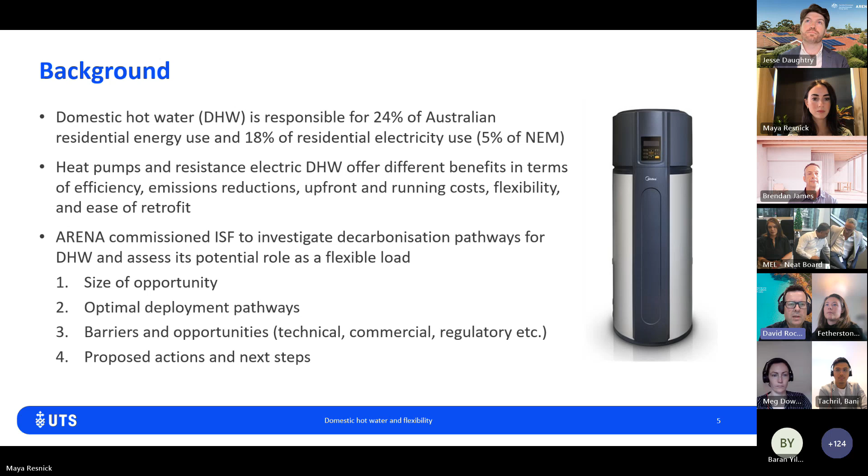Next slide, please. So what did we do? We did a literature review and a number of interviews with stakeholders to identify and inform some of these development pathways and some of the barriers and opportunities. At the core of the study, we had a stock modelling exercise. So we have an existing stock model that we use at ISF that was originally built by our water team and then has been adapted to include hot water. So there's an energy component to that.

And so using that model, we're able to model the number of currently installed different technologies, the mix of technologies, and do some different scenarios about what that stock might do into the future, and then from that assess both the efficiency and the capability in terms of flex demand of that technology. And then at the end of the project, we had a sense-making workshop with ARENA to clarify some of these deployment pathways, the barriers and opportunities, and map some proposed actions and next steps.

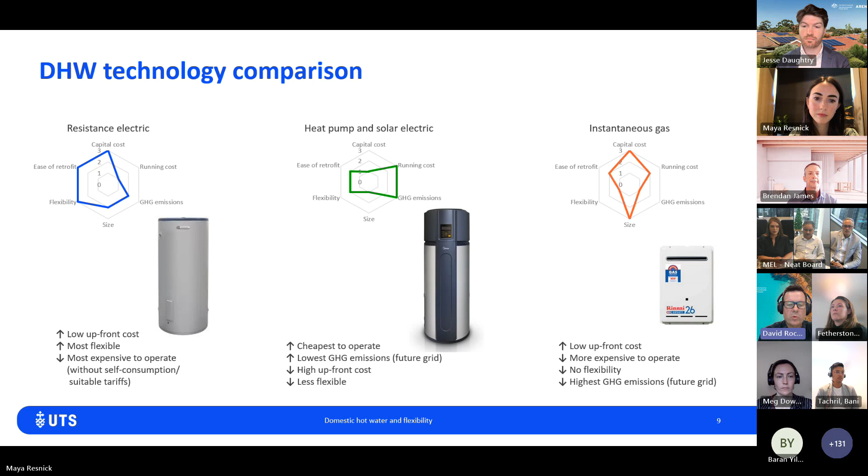And then, as I mentioned, resistance electric, pretty low upfront cost, offers the most demand flexibility, but can be more expensive to operate, particularly if you don't have solar or some sort of subsidized tariff. And then the heat pump is the most efficient technology, but has less demand flexibility and is one of the more expensive technologies to purchase. So next slide, please. Actually, I might skip this slide. I'll talk about emissions in a sec. So we'll just go to the next slide.

Thanks. So to the modelling, we modelled 4 different scenarios. So we started with a business as usual scenario where we just look at what the current trends are. There's no government policies around forcing gas out of the system, and then made some assumptions about the demand flexibility of what electric technologies are left. At the other end of the scale, we had a rapid electrification scenario where we very quickly get gas out of the system through whatever policy mechanisms are available to government, and we replace those gas systems with a mix of resistance and heat pump, but mostly towards the heat pump end.

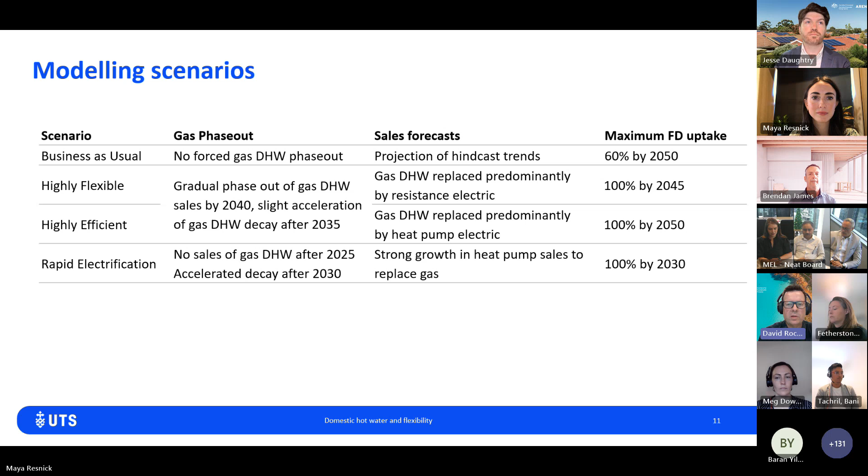And then in between those two scenarios, we had what we called a highly flexible and a highly efficient scenario, and they were again a somewhat accelerated phase out of gas. In the case of the highly flexible scenario, we have more of an emphasis on the resistance electric technology, and in the efficient, we have more of an emphasis on the heat pump technology to tease out what some of the differences between those two scenarios might look like.

Next slide, thanks. So in terms of the size of the opportunity, this is really one of the core messages out of the project: business as usual is a really lost opportunity, a very large missed opportunity in terms of the amount of demand flexibility, capacity and depth that could be brought into the system by adopting some of the other scenarios. In terms of the size of that, about 24 gigawatts of flexible demand capacity is the potential, and the depth of that is about 50 gigawatt hours per day.

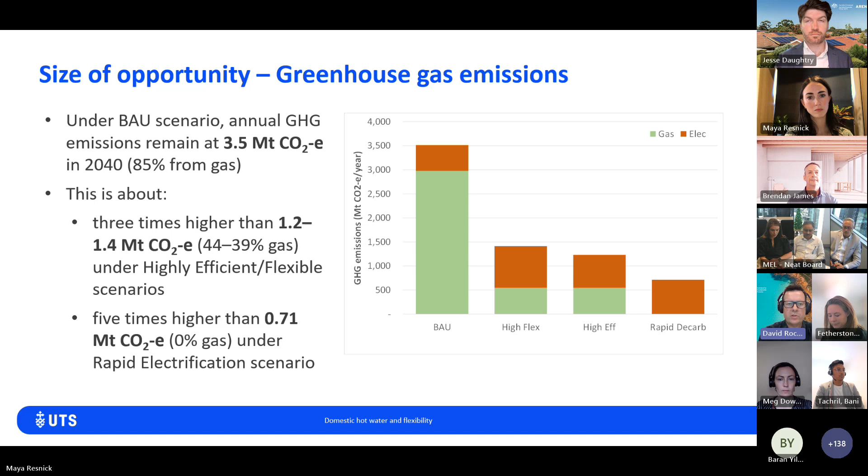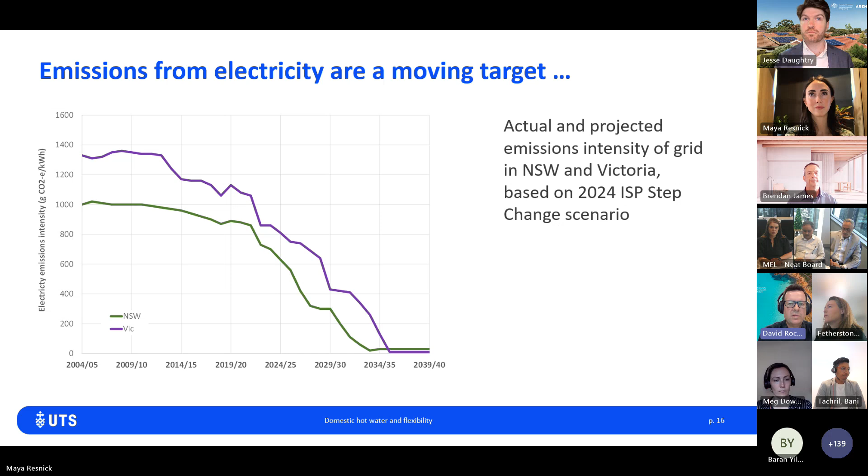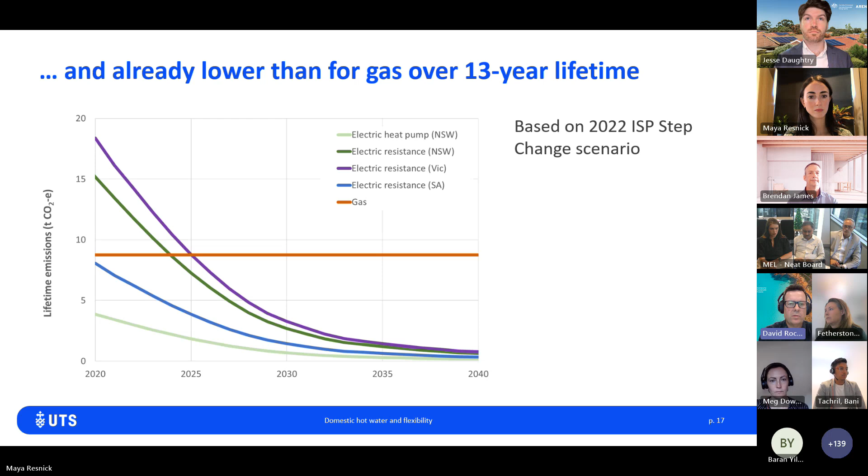Next slide, thanks. If we're comparing the technologies, it's interesting to look at what's happening to electricity emissions, and it's a moving target. This shows the actual and projected emissions intensity of the grid in both New South Wales and Victoria, based on the 2024 ISP step change scenario. Next slide, thanks. If we look at the forward projections, if we're making a decision today about what technology to put into the system, we're at the end of 2024, almost 2025, and in pretty much all states the electric technologies, even the less efficient resistance technologies, are less intensive than the gas technologies, which don't have a credible decarbonisation pathway.

Whereas the network controls offer more responsiveness. You can have old-fashioned ripple control, and most pundits suggest that smart meters are probably the technology most likely to dominate in this field. I think the presentations we'll see talk a lot about smart meters because that's the technology that gives pretty low cost and complexity and adds a lot of responsiveness. There's a lot of orchestration that can be enabled through smart meters. Next slide, thank you.

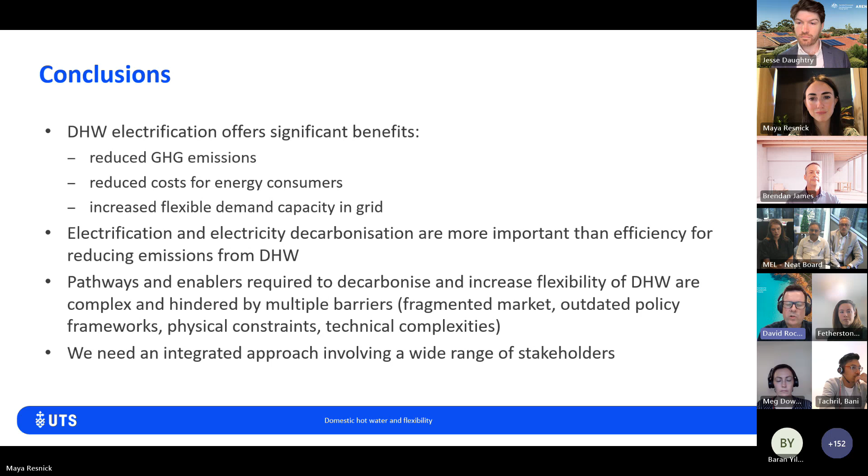Electrification and electricity decarbonisation are more important than efficiency for reducing emissions, and the pathways and enablers that are required to decarbonise and increase flexibility of domestic hot water are quite complex and they're hindered by multiple barriers. So we've got fragmented markets, we have some outdated policy frameworks, physical constraints, and some technical complexities. So it really needs an integrated approach involving a range of stakeholders, so networks, retailers, water utilities, etc. I'll go to the next slide, thanks. I think this is my last slide.

So key recommendations were to develop a national strategy that emphasises electrification and flexible hot water. We need to strengthen performance standards, particularly around things like heat pumps, and we're very pleased to see that that's currently being addressed through the heat pump roadmap that's been facilitated by the Energy Efficiency Council. We also need energy rating standards for things like heat pumps, as well as other residential hot water systems. Things like the National Construction Code, I think, provide a bit of a barrier in this space, so we'd like to see some improvements there.

And I think one of the key ones also, which perhaps some of the presenters today will be talking about, is tariff reforms to reward customers for flexing their hot water.

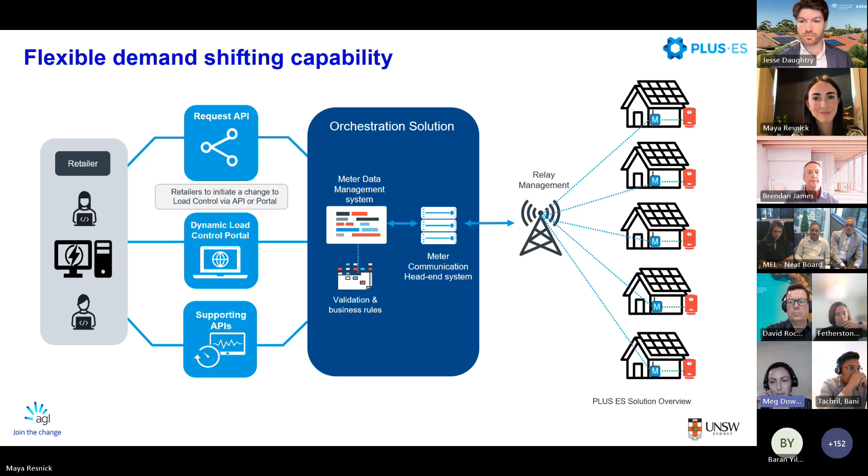As Brendan touched on, we also had some water health and safety requirements to meet around Legionnaire's disease with our schedule development. Network stability was very much at the forefront of how we developed these schedules as well, and making sure that the randomization and ramp rates of when we were turning these systems on wasn't going to cause any network stability issues.

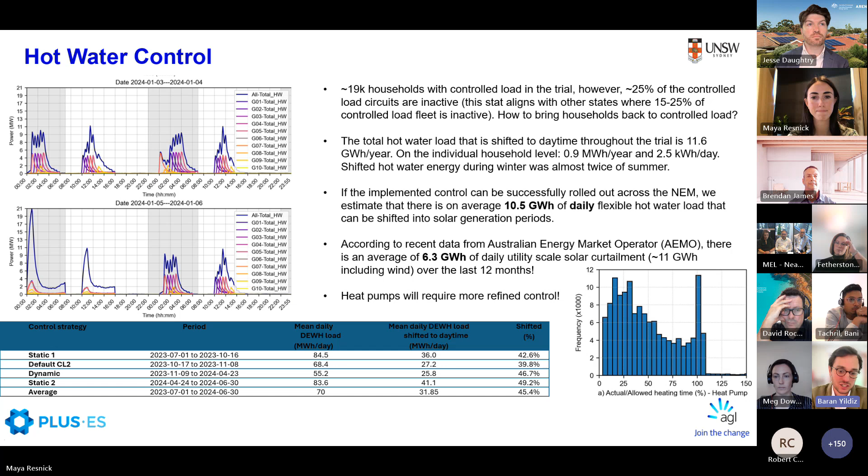So we're looking at the financial and emissions reduction. According to our estimates, and this doesn't include any additional data or platform costs that will be incurred by using these more smart meter control, we estimate that around $63 per year saving opportunity for households for that 0.9 megawatt hours of shifted load. And that saving opportunity happens just because we're comparing this to the traditional control load 1, the nighttime heating, and the wholesale prices are lower during the day. So when we shift this load, there is the saving opportunity.

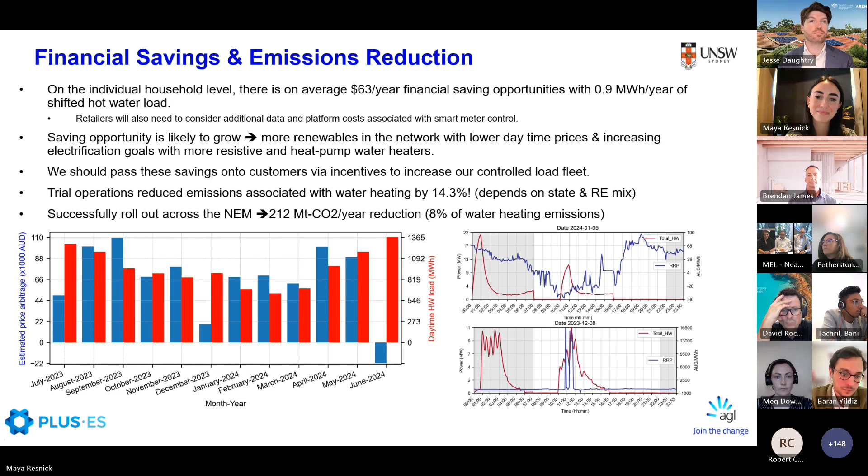So the voltage drop associated with hot water operations was even greater for these systems. So it shows the potential of hot water control to mitigate these issues due to increasing solar exports. This would obviously depend on the network type, whether it's rural, whether it's urban.

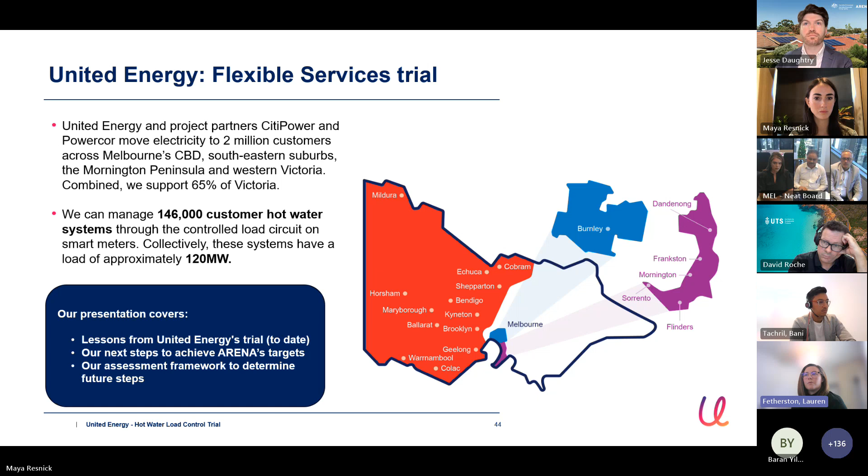So the hot water trial is a set of 3 trials as part of our program. We're looking at flexible services, a suite of flexible services for our customers. So it's also looking at providing dynamic operating envelopes for our customers through our LV-DERM system, and also exploring how we can expand LV-DERMs to a scalable solution to help onboard customers.

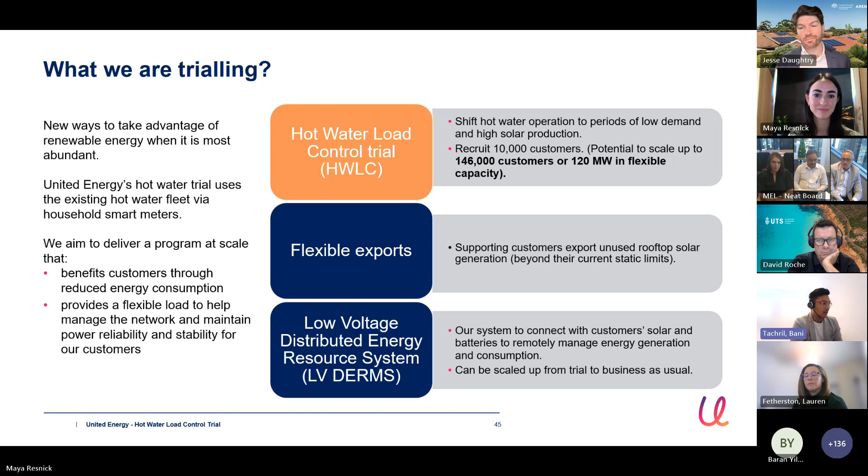Yeah, so I just want to give a brief update on where we are. As Lauren has mentioned, we're still in the early phases of the trial. And in terms of our commitment with ARENA as part of this program, our approach is to understand what is our system capability, and then slowly expanding that to understand what is the impact to the customers, and then what is the impact to the network, and then how all stakeholders can benefit from this as we progress towards a bigger number of customers. Moving on to the next slide.

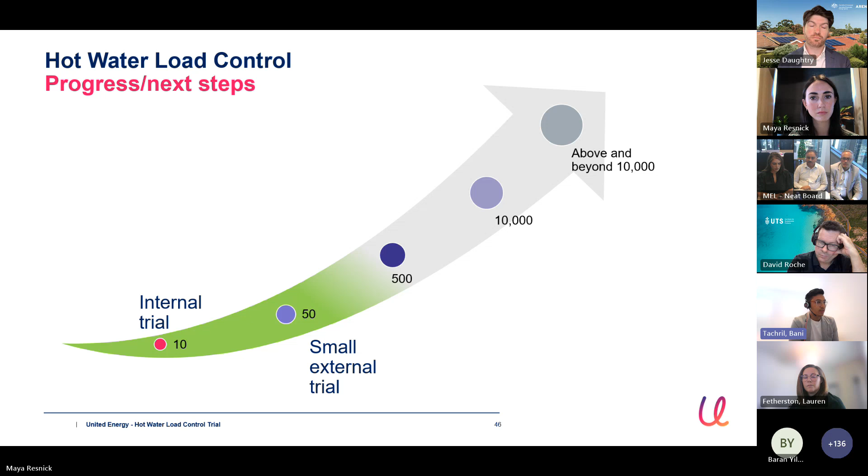And so what that means is, again, sharing what other presenters have found, we do still need to retain some of the load at nighttime. And this is anecdotally due to the heat loss that is greater at nighttime compared to during the day. And so based on that, we're focused on finding a solution that works for everyone, which means retaining some of that load at nighttime and shifting some of it to the middle of the day.

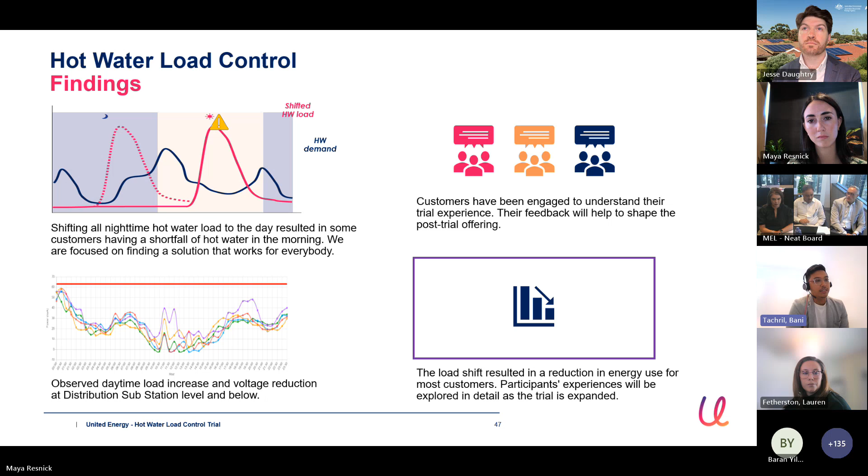And so all of these results are really promising, but nevertheless, we do need to go to the next phase of the trial in order to validate those findings, because as you can see in the earlier slides, these were only on a small handful of population. And there are also some challenges as well with this. So Maya, if you can go to the next one.

So a clear finding here is that we managed to successfully increase the load in the middle of the day. However, based on what we conducted, there's definitely room to improve that in order to make sure that the load is spread more evenly throughout the solar soak period or the load shift period here. And so in the next trial phase, we wanted to try different scheduling options in order to match that energy consumption with the solar generation curve.

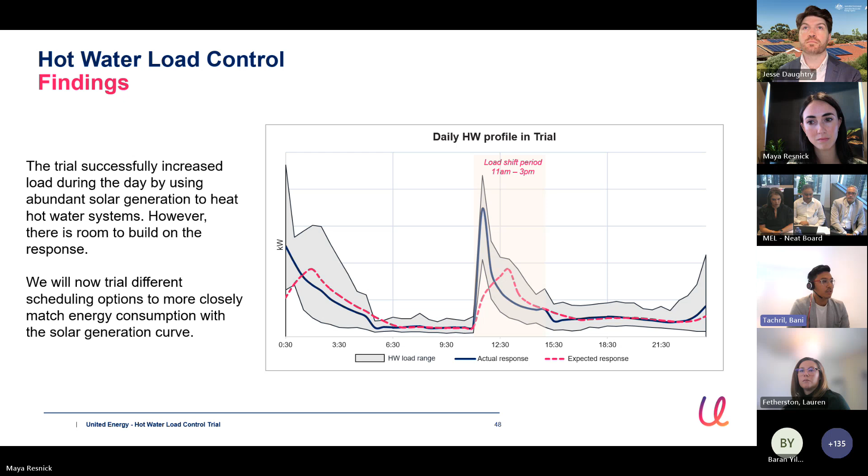Next slide, please. And here I wanted to mention some of the challenges with this trial, in that in order to do a proper analysis, we need a reliable data set, and that proves to be quite a challenge to us. And this is because of various factors that are outside of our control. So things such as weather in that particular part of the network, as soon as there's cloud cover, it creates a skew in how we baseline our results against a similar period in the previous year.

There's also rapid network changes as well when you start to assess at that level. For example, there's some network switchings or network upgrades that are done between the same period last year and during the trial. There's also changes in tenancy, which changes the behaviors of the customer and the way they use their hot water, as well as the demand of the hot water. Customers going on holiday also create an impact and skew the result. Relatives moving in throughout the period, also even Airbnb properties, which created quite a large skew.

And all in all, after all that, we were left with a small sample and ended up with the data set that we relied upon to come up with those analyses. And so, yeah, that's definitely one of the challenges. And so hopefully in the next step of the trial, we'll be able to have a larger cohort of customers in order to get a much more reliable data set that would be much more representative of the population of the network.

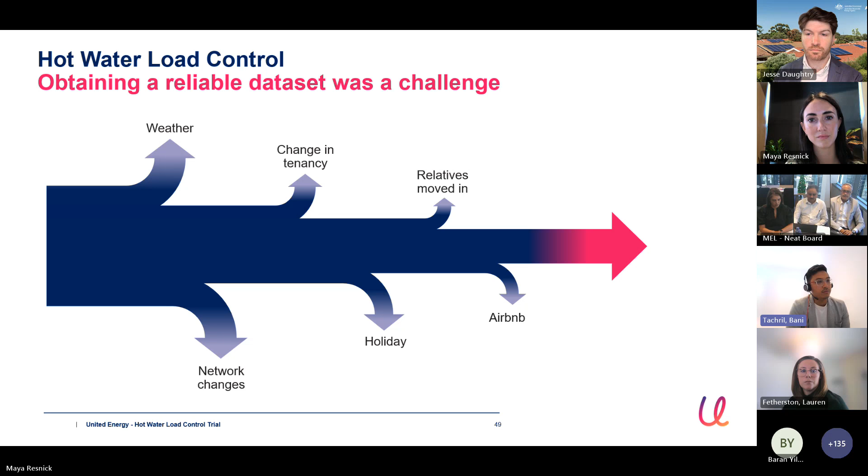If you go to the next slide, which I guess is what we're planning to do in the next trial. We plan to expand the trial to a larger scale in order to get a much more reliable data set, which would represent our population of the hot water fleet. We also plan to do the trial over a longer period in order to take into account those seasonality variations as well.

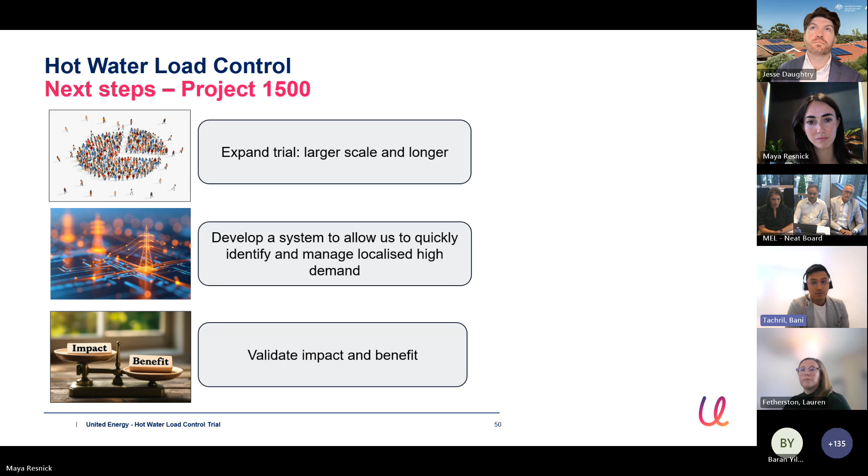But also, most importantly, in the next step, we also need to develop a system that allows us to quickly identify and manage localized impacts in the network and manage those issues proactively and rapidly at scale, especially once we start to expand this to larger areas. And then finally, once we have those reliable data sets and ensure that we have the systems in place to quickly identify those issues, we can validate the impacts and benefits. I'll pass on to Lauren again now to finish off.

Thanks, Bani. So I guess at this point in time, we've sort of got three scenarios where we see how this could be rolled out in the future with our hot water fleet. So the BAU option, which is essentially now just servicing it as a response to minimum system load. So that's where we respond and switch on the hot water units throughout the day on days of high solar generation and when we're called upon by AEMO.

Our second option, which is sort of a hybrid option, as Bani mentioned, we still need to finalise and work out with certainty our concerns around winter peak demand and how the hot water fleet sits upon that. So we could look at a seasonal shift, so we'd shift in the shoulder seasons rather, or work on a day-to-day scheduling operation as well.

The other option could be a permanent schedule where it's largely set and forget, where we've optimised and feel confident that throughout the whole seasons we could shift the whole fleet and essentially leave it as a permanent schedule. In terms to value stack and assess that, you know, we'd obviously have to look at the customer experience, making sure that there's no impact to our customers in terms of energy consumption or loss of hot water.

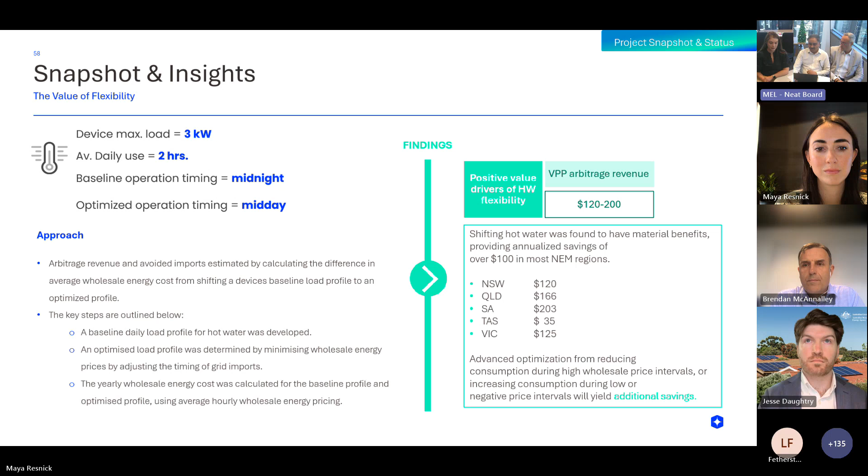I now hand over to Brendan McAnnalley for presenting the rest of the slides. Thank you. All right, thank you, Bowen.